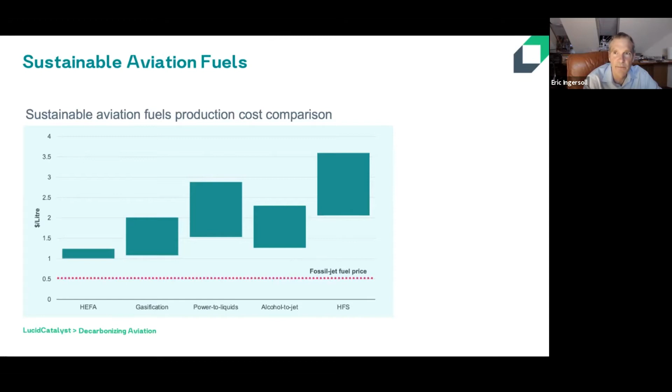So one of the things that's very important to keep in mind is that if we're going to make synthetic fuels, and there are people proposing to use solar energy to make hydrogen, or using wind energy to make hydrogen, and then use that hydrogen to combine with CO2 to kind of run the combustion process backwards and use that to make a synthetic hydrocarbon.

The principal energy input for that process is in the form of the hydrogen that you make. So the cost of the fuel is really determined by the cost of that hydrogen. In the case of synthetic hydrocarbons, it's also determined by the cost of the carbon material that you're using, which is in the form of CO2, which costs something to collect from the environment or from another source.

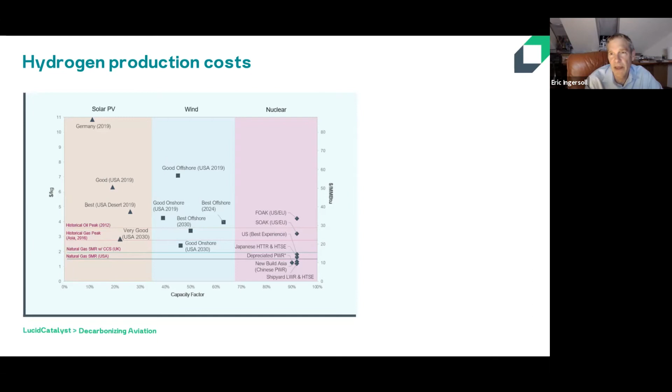What the graph also shows is that by changing the way we deliver plants like that, there's a potential to make very low cost hydrogen, and to make hydrogen in the cost ranges that we saw in the previous graph were needed to make large scale synthetic fuels. So let's look briefly at how that process would work. Unless there are chemists in the group who want to ask me more detailed chemistry questions, I'll keep this quite high level.

And that produces the ingredients that you need to go into your fuel reactor, your Fischer-Tropsch reactor, which is a big chemistry plant. And that combines the hydrogen and the carbon monoxide into a hydrocarbon. And depending on a whole bunch of process details, you can produce different types of hydrocarbons, so you can produce exactly what is needed for jet fuel. And in fact, in South Africa, because they don't have their own oil, they used coal to run this process. And same with Germany during World War II. And both have supplied substantial transportation fleets this way. But it's not necessary to use coal if you have a source of CO2 and a source of electricity.

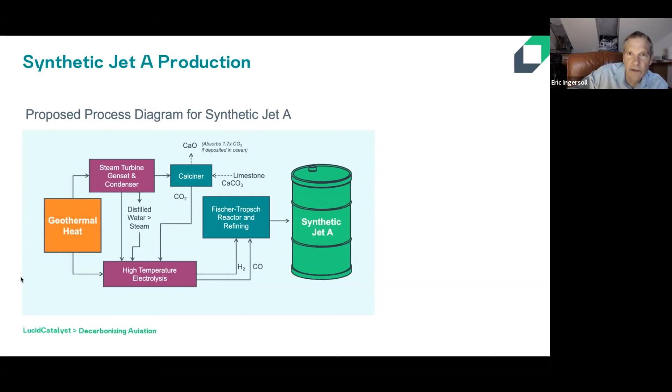So we have just completed a very detailed study looking at how to deploy these types of technologies in a very cost-effective way. So one aspect of this system diagram is, can you technically do it? And the answer is, of course, yes, it can be done and has been done a lot before, but it needs to be done in a way that we can both deploy units very cheaply and deploy many of them. Because if we could make one and it was very cheap, but it took us 10 years to do it, it wouldn't really be a scalable solution to match the 5 billion barrels of demand that we need to power the global fleet.

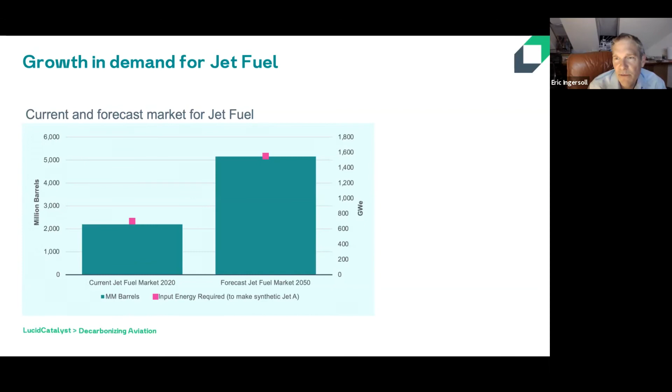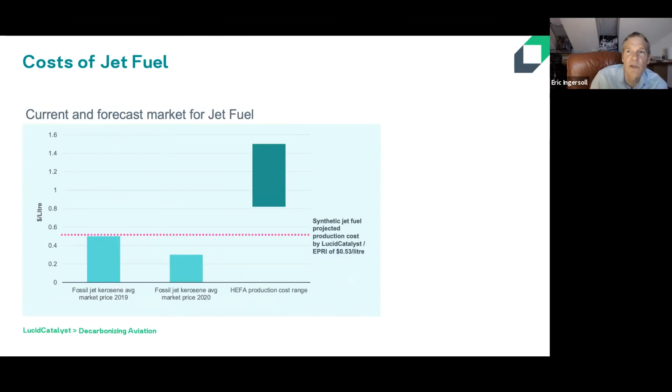So it's not good enough just to make these things cheap. We have to be able to make a lot of them quickly in order to supply this. And it has to be cheap enough so that people are willing to switch to this instead of buying fossil fuel. So we have been doing a lot of work on how you could make these production platforms in highly advanced shipyards. The large container ships, tankers and other large commercial vessels are made in about 20 different shipyards around the world, in highly automated, very efficient, highly engineered processes.

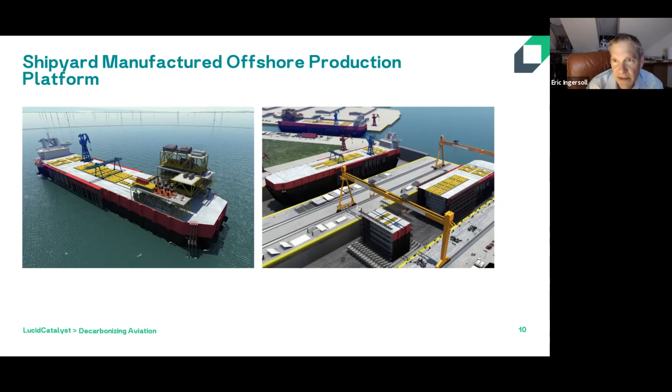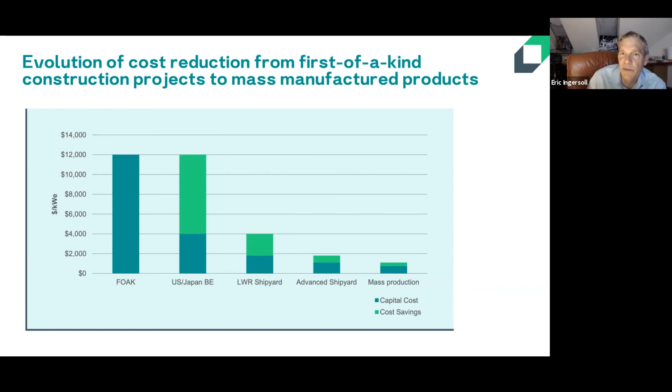Then there's a kind of further cost reduction that comes from the process of making thousands of them. And that's not very big compared to these other big bars, but it's a kind of a meaningful reduction. It's approximately another 25% to 30% reduction.

So we also, as part of this project, looked at the reduction of some of the other principal capital cost items in these plants. And one of them is the high temperature steam electrolysis equipment. And although that's just being commercialized today, there's been a lot of work at some of the national labs working on how you could redesign the systems, especially if you're building bigger systems that you're going to be deploying into large plants like this, and how those innovations and deployment models could lower the cost. And our analysis shows that if you can get to below $400 a kilowatt for these things, you can achieve those extremely low costs for hydrogen that I showed on the other chart.

So we're almost done here. So I'll just show a couple more pictures. So this is a kind of artist's rendition of an offshore production platform. Looks like a ship, the big green thing, but it's actually not. It's anchored. It's made in a shipyard, and it's made in a dry dock. It's made in the same sort of dry dock and shipyard that makes container ships, which is why the hull looks kind of like a container ship hull.

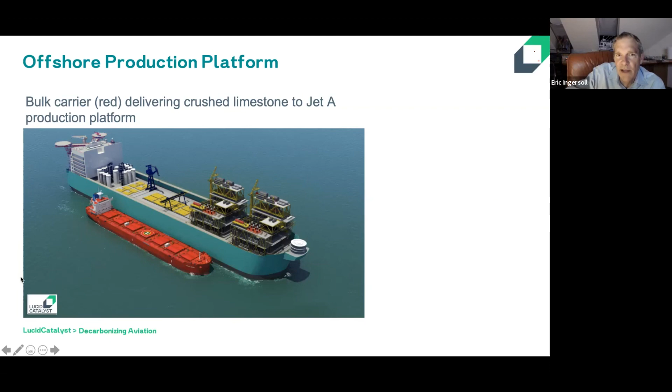But it's full of production equipment and some advanced heat sources like advanced nuclear reactors and electrolyzers to make hydrogen. And this one is receiving a delivery of crushed limestone, which goes through the calciner to make the CO2. And then when the crushed limestone is loaded onto the ship, the production platform offloads the lime, which is the result of the calcining operation. That goes back onto the red ship, and that's mixed in with the ocean water as the ship returns to pick up more limestone.

And that deacidifies the ocean and captures about 1.7 times the CO2 that would be released by burning the fuel because of the bicarbonate reaction in ocean water. So it both deacidifies and helps create a carbon negative fuel. So by burning this fuel, you'd be sequestering 1.7 tons for every ton of emissions that you create. And one of the things that we believe is that we're going to have to start thinking beyond neutrality in terms of carbon, that we're going to have to start trying to make all of our processes carbon negative, not just carbon neutral, because of the amount of carbon that's already made it into the air.